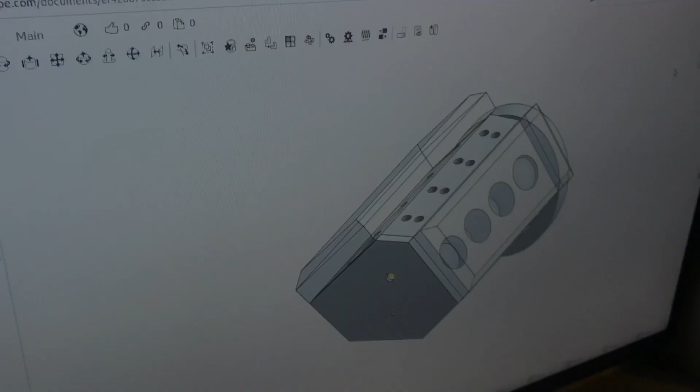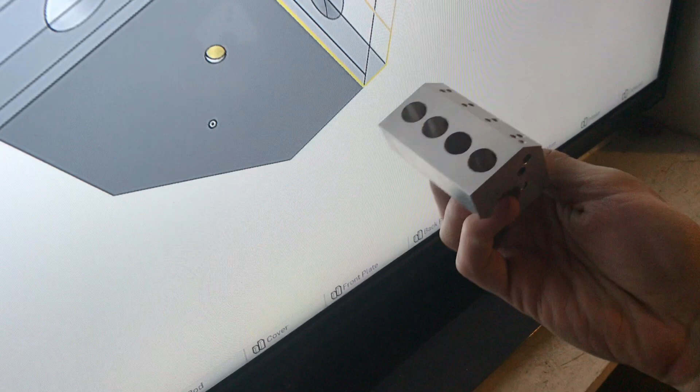This is an 8-cylinder compressed air engine that I designed in CAD in Onshape. And this is one of the parts from it that I've made. This is on a manual mill. Everything you see here is on a manual mill. It's the main part, that's the block. The same part here is what I just showed you.

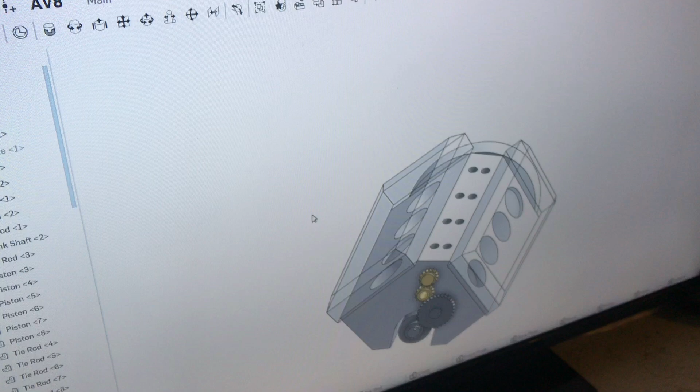So the entire assembly here, if I get rid of this front plate, it's a little bit easier to see. And if I get rid of the block itself, you can see inside of this how it works. It is a compressed air engine. So this is the intake. Air will come in this brass tube, and this is the exhaust. It'll come out the back right here.

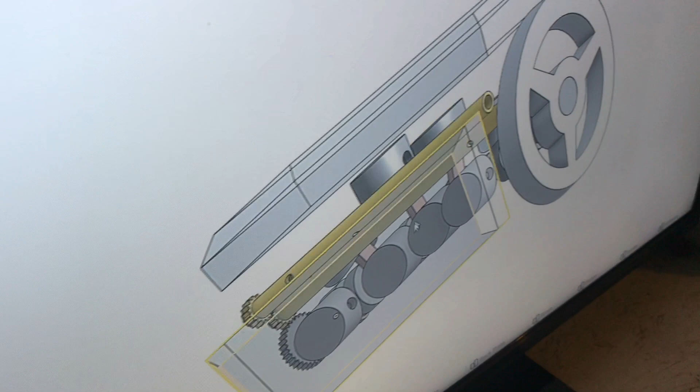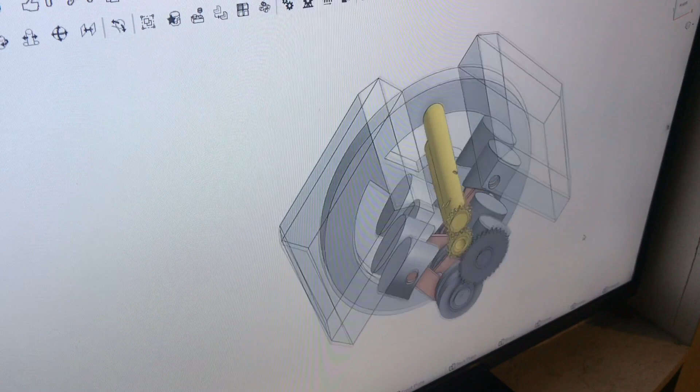It's a little bit confusing to understand how this works, but if I turn the flywheel, all the pistons are going. That's because of this crankshaft down here, and the pistons are, each one's offset a quarter of a rotation, and everything is kept in time.

Here, this would be a gear. I don't have the gear in place right now, drawn in the CAD, but this would be a gear, and that keeps both our intake and exhaust in time, and this gear just transfers the motion up there.

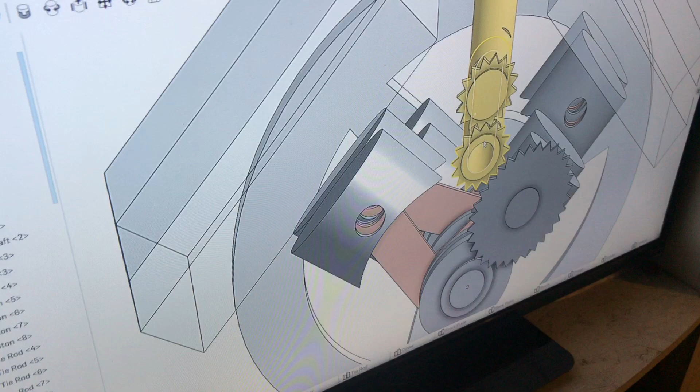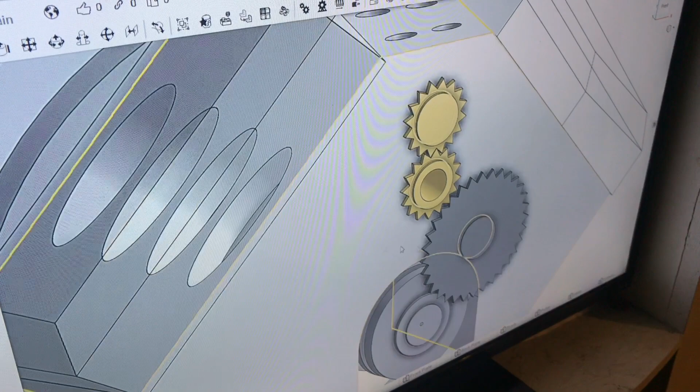When we put air into the intake right here, there are holes all the way around this, and same on the exhaust, that direct where the air goes into which piston, into which cylinder. And the block, the engine block, has channels in it. This will probably be really hard to see with all these lines.

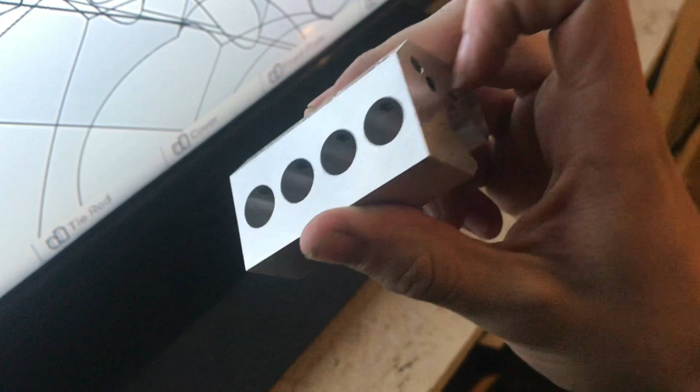I'll come over to this side. Still, it's a little bit confusing, but you can see there's holes drilled. It's the same holes that are drilled up here and in there and here. All of these holes and all these directions create channels for the air to flow through.

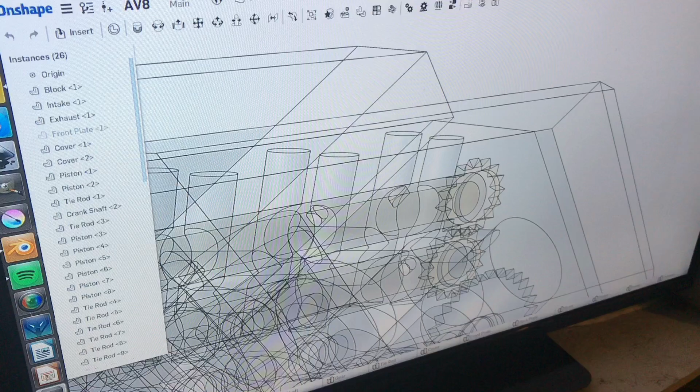And back on our main assembly, you can sort of see, maybe from this angle, that as these turn, we have our holes changing position, which redirects the air into a different cylinder. So that's the basic concept of this engine here.

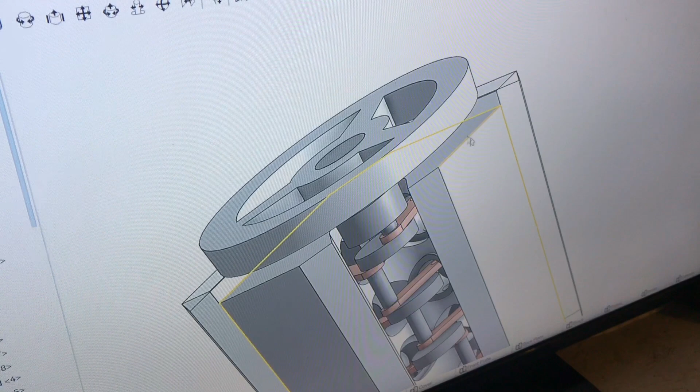It's not complete quite yet. I need to add a back plate there, and I need to add teeth on this crankshaft. But it's a really interesting design. I'm really excited to see how the rest of the parts turn out. This is the first one I've made, and I'll be making the other ones to see this thing go together.

Down here I have another compressed air engine. This was the first one I made. I didn't design this, I used someone else's design. But this is all done manually. All the parts that you see here are machined manually, except for this valve and the fittings here, and the hose clamp.

This is a 1-cylinder rather than having 8 cylinders here. We just got one big one, and this cam that's in time with our flywheel actuates this piston here, so it engages the valve on different parts of the rotation, and the valve feeds air into our cylinder to push the piston back and move the flywheel.

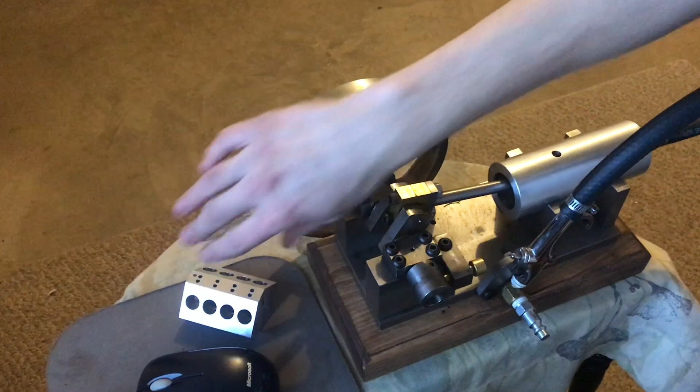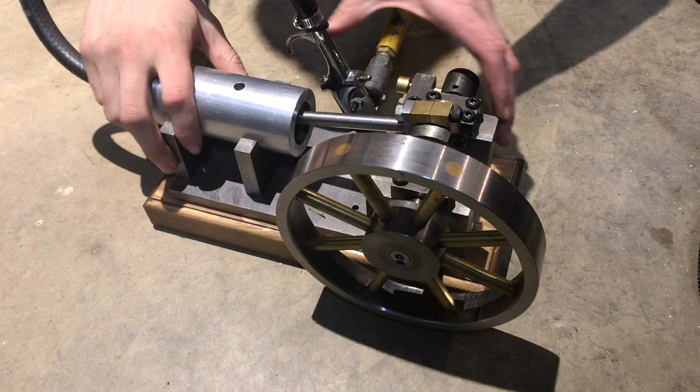This works on similar principle, but the way that it redirects the air is a lot different and a lot more complicated. But they should both be able to run on compressed air or steam. Here's the 1-cylinder engine. You can run it off of compressed air or steam, but right now I have compressed air hooked up. So as soon as I push this valve in, it should start to run. Anyway, I'm pretty excited to see how this engine turns out.